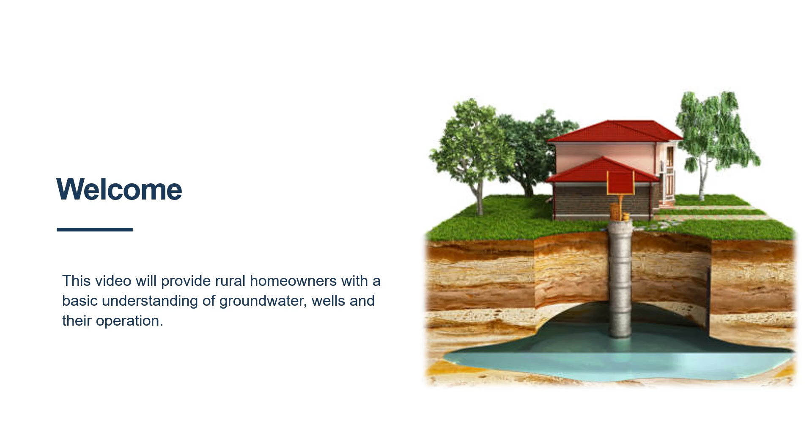Welcome to Introduction to Wells. This video will provide rural homeowners with a basic understanding of groundwater, wells, and their operation.

The water cycle is the movement of water between land and bodies of water. It naturally recharges our surface and groundwater sources. Let's take a closer look at the water cycle and how our groundwater supply is maintained.

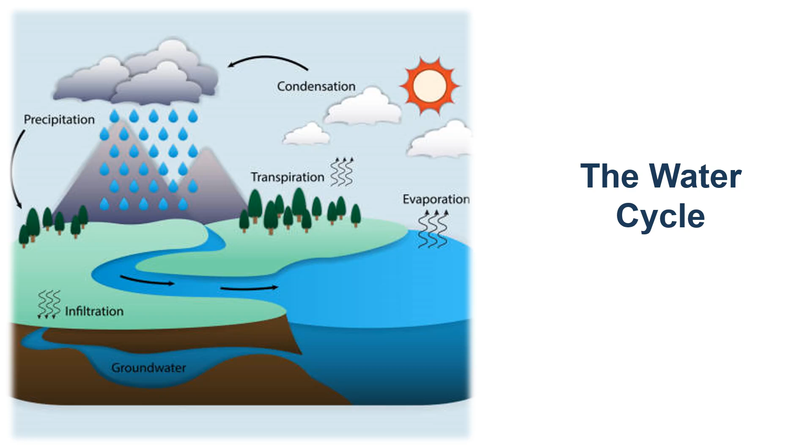Let's get the big picture of where drinking water comes from by looking at the life history of water, called the hydrological cycle. We'll look at this cycle by starting up in the clouds. Water vapor condenses and falls as rain or snow, which are two different forms of precipitation.

Then it takes one of two pathways. It flows as runoff over the surface of the earth and collects in lakes and streams. This is called surface water, or it soaks into the ground, called infiltration, and becomes groundwater.

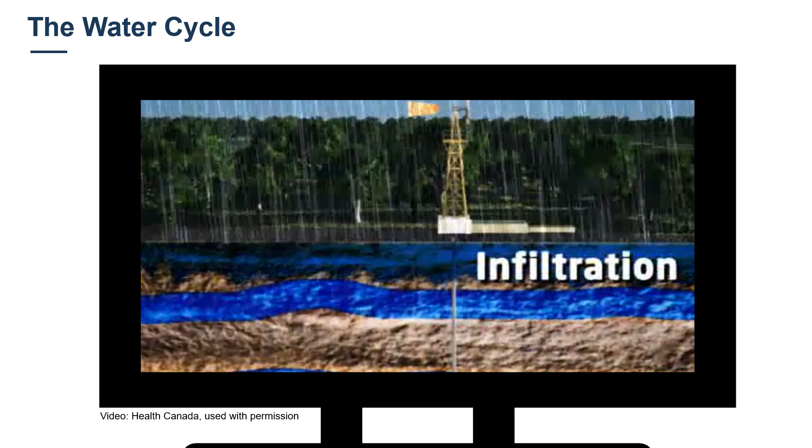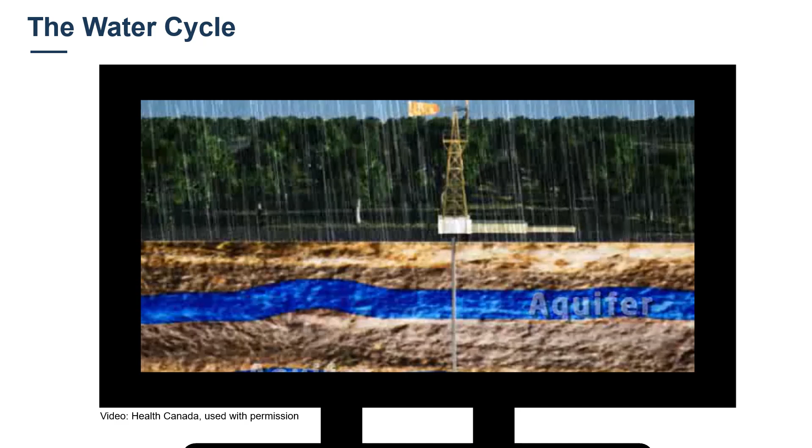Groundwater concentrates in underground regions called aquifers. To use this water, we drill wells. Some water from aquifers flows into lakes and oceans. There, it becomes surface water.

Some surface water will evaporate and return to the atmosphere. Surface water also flows to the oceans, and some evaporates back into the atmosphere. In addition, water evaporates from trees and plants after being absorbed from the ground. The evaporated water forms clouds by condensation, and the cycle begins again.

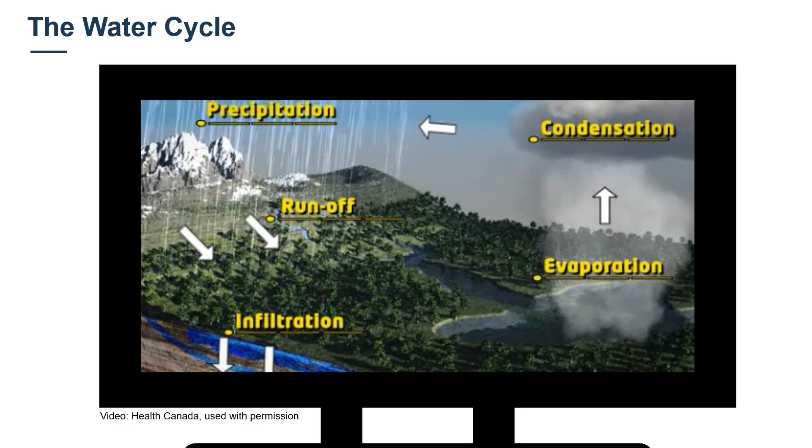During each phase of the hydrological cycle, water can pick up contaminants that are harmful to people.

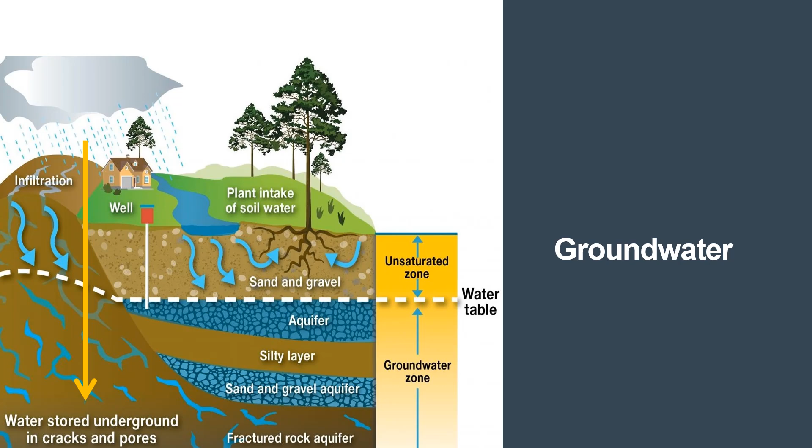Groundwater sits below the Earth's surface. It is recharged by the infiltration of precipitation that soaks into the layers of soil. But we should be aware that water may not be pure. Let's watch a brief video about potential contaminants in our water.

Natural sources of water, surface water and groundwater, contain contaminants and are never pure water. These contaminants can come from natural sources. Animals, plants, and the soil can all contribute contaminants to water.

Human activities can also add contaminants to water. Urban wastewater and stormwater, industrial activities, and activities on the land such as farming and forestry are just a few examples.

The most significant acute health risk to a consumer is drinking water contaminated with microorganisms that you cannot see without a microscope. Although a lot of microorganisms found in nature are harmless, it is important to understand that those coming from the digestive tracts of animals and humans can potentially cause illness and are referred to as pathogenic.

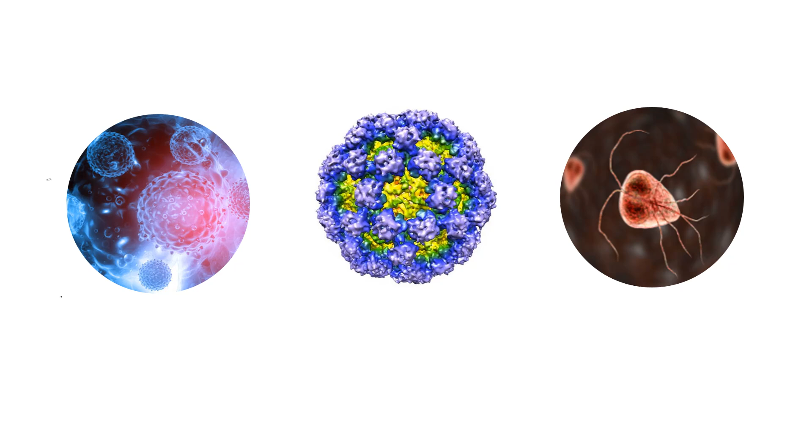The three main groups of organisms that may cause illness are bacteria, viruses, and protozoa.

Bacteria are the most well-known type of pathogen and are found everywhere. While most are harmless to humans, exposure to harmful bacteria through drinking water can lead to severe illness, or in some instances, death. Just one exposure to bacteria can cause health problems related to the stomach and intestines. Symptoms can develop over the course of a few days, or after just several hours.

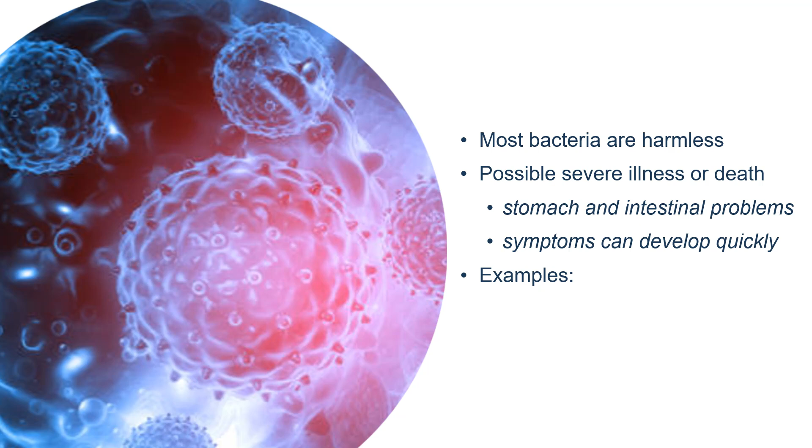Examples of bacteria include E. coli, Salmonella, and Campylobacter.

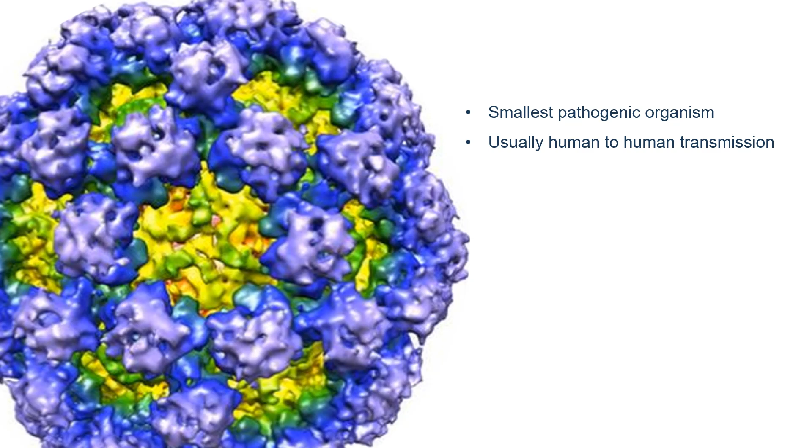Viruses are the smallest of the three pathogens described here. In fact, viruses are the smallest of all microbes. With few exceptions, a human is only affected by viruses from other humans, as most viruses prefer a specific group of hosts. To determine if a water source may be contaminated with viruses that could be harmful, consider this question: are there human sources of contamination present?

Although it was once believed that viruses were only a concern for surface water systems, and that deep groundwater was secure from viral contamination, it has recently been discovered that viruses can not only reside in aquifers, but can travel through them with the movement of groundwater. It is possible that human contamination from elsewhere could reach your raw water source, even if you are using groundwater.

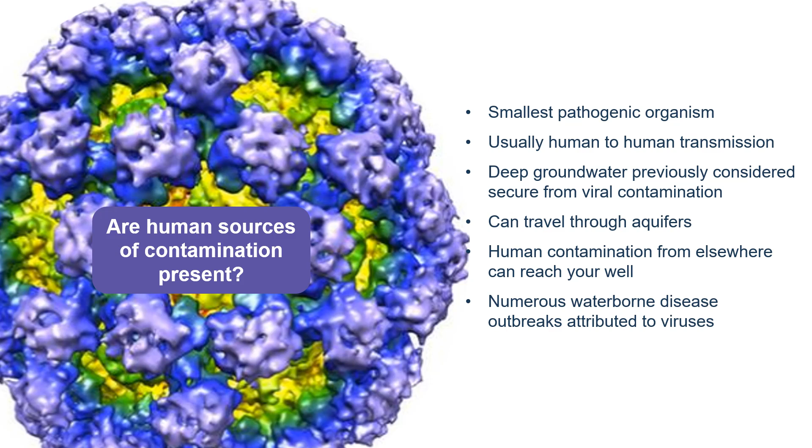Numerous waterborne disease outbreaks have been attributed to viruses, though it is sometimes difficult to determine the exact source of contamination or the specific virus involved. Examples of viruses found in drinking water include hepatitis and norovirus.

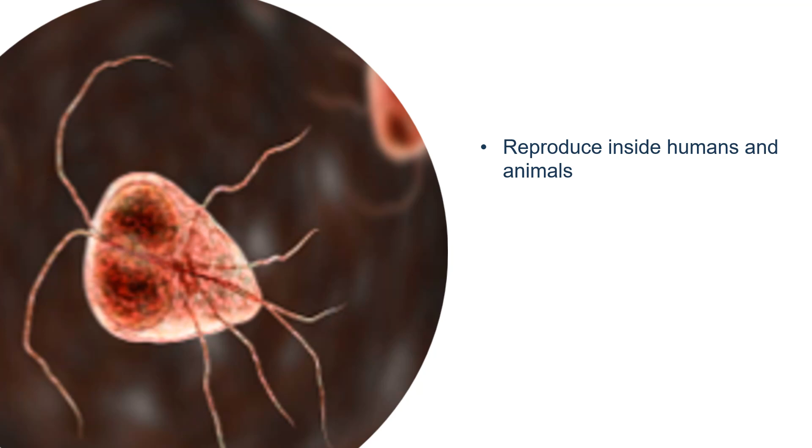Protozoa are unable to reproduce on their own. Humans and animals act as hosts for reproduction, and typically cause gastrointestinal problems or worse.

We usually find these organisms in surface waters and groundwater under the direct influence of surface water. Although they are typically not as prevalent as bacteria, protozoa are still a major concern. Examples of protozoa found in groundwater are Giardia and Cryptosporidium.

Let's find out more about E. coli and the total coliforms that are referenced in your drinking water test results.

Coliform is a common name for a group of bacteria. They are found in the feces of humans, warm-blooded animals, and in soil. Coliform bacteria are not necessarily pathogenic or dangerous to humans. However, coliforms are generally found in greater numbers and are hardier than other pathogenic bacteria.

Therefore, the presence of coliforms is used as a possible indicator of fecal contamination, as well as the presence of other pathogenic microorganisms associated with fecal contamination. For drinking water to be considered safe, there cannot be any total coliform or E. coli found in the water sample.

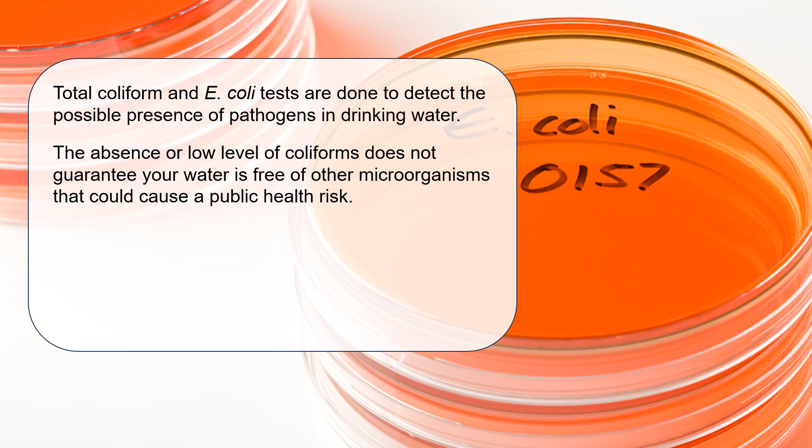Total coliform and E. coli tests are done to detect the possible presence of pathogens in drinking water. The absence or low level of coliforms does not guarantee your water is free of other microorganisms that could cause a public health risk. You must test your water frequently to reduce the risk of contaminated water reaching consumers.

The location of all Ontario public health units can be found online. Contact your local public health unit if you have concerns.

Now let's review the regulation that well drillers are required to follow when installing and maintaining wells, and the different types of wells that deliver water to our homes.

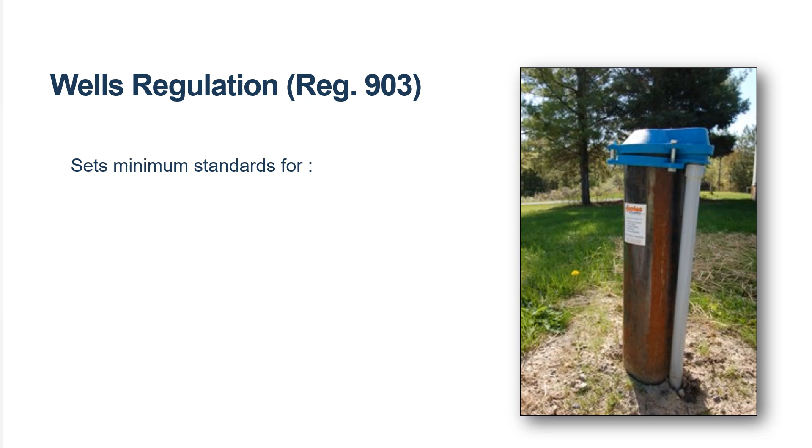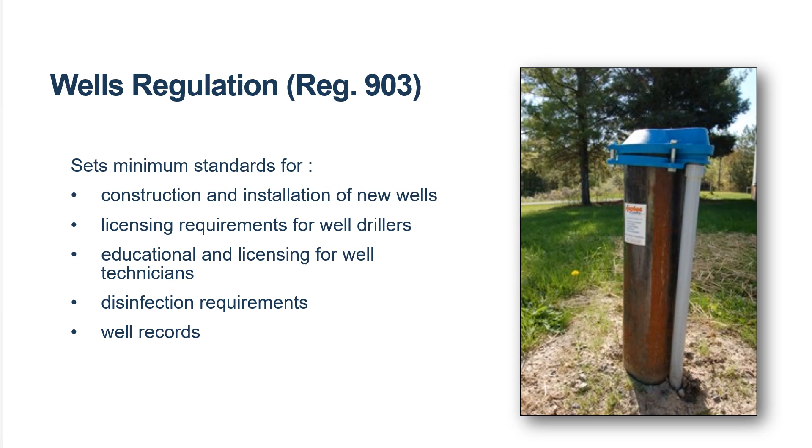Owners and well contractors have legal responsibilities for ensuring the protection of the province's groundwater when drilling a well. Ontario Regulation 903, made under the Ontario Water Resources Act, sets minimum standards for the construction and installation of new wells. The regulation also sets rules regarding the qualifications of well contractors, the education and licensing required for well technicians, disinfection requirements, and well records. The complete well regulation can be found online.

There are 4 common types of groundwater wells in Ontario: drilled, dug or bored, shore, and sandpoint wells. The water table depth and nature of sediments are key factors that determine the type of well to be constructed.

Drilled wells are constructed using a drilling rig and a drill bit. There are many different types and structural differences depending on the aquifer. Current legislation requires that the well casing should extend a minimum of 40 centimeters above ground level and 6 meters, or 20 feet, below ground.

The well casing serves as a house for the pumping equipment as well as the wall of the well, protecting the well from contamination or cave-ins.

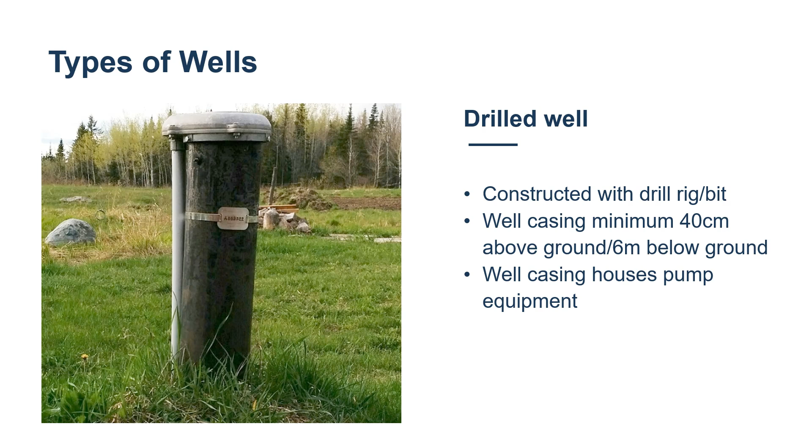Dug or bored wells, often hand-dug in the past, are now constructed primarily with excavation equipment such as an earth auger. The borehole is then lined, or cased, with masonry or concrete. Dug wells can only be installed when the groundwater is close to the surface, 9 meters or 30 feet deep.

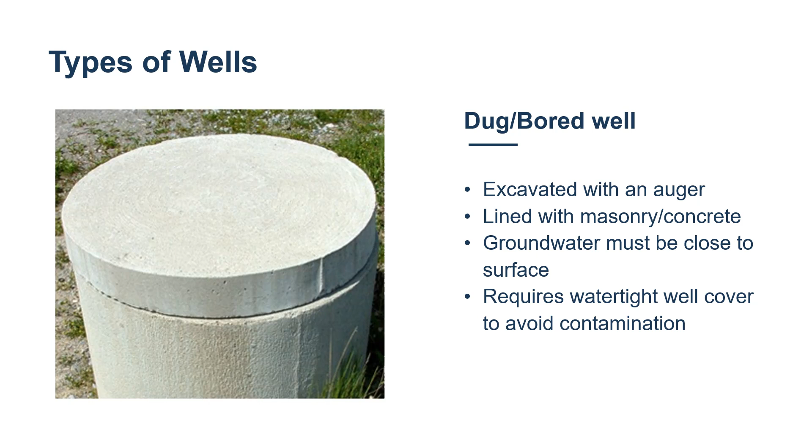The well casing must be covered with a solid, watertight well cover so that surface water and other foreign materials cannot enter the well.

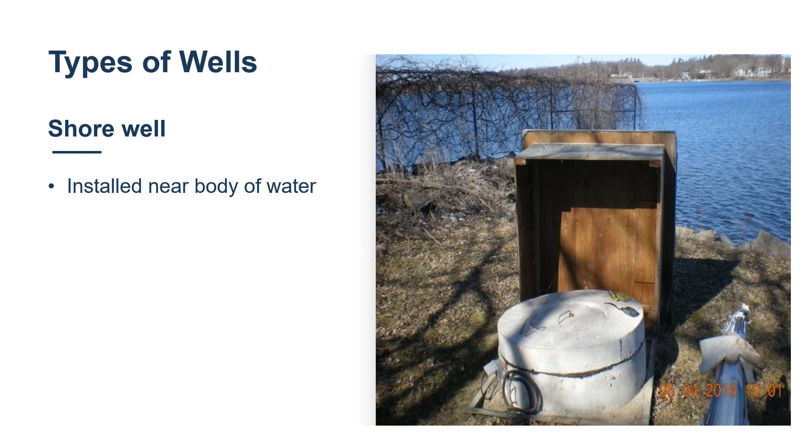Shore wells, also known as infiltration galleries, are shallow wells installed near a water body in a shallow aquifer directly connected to surface water. Water is collected through a covered stone-filled trench that drains surface water to a storage well or tank. Soils surrounding shore wells provide minimal filtration.

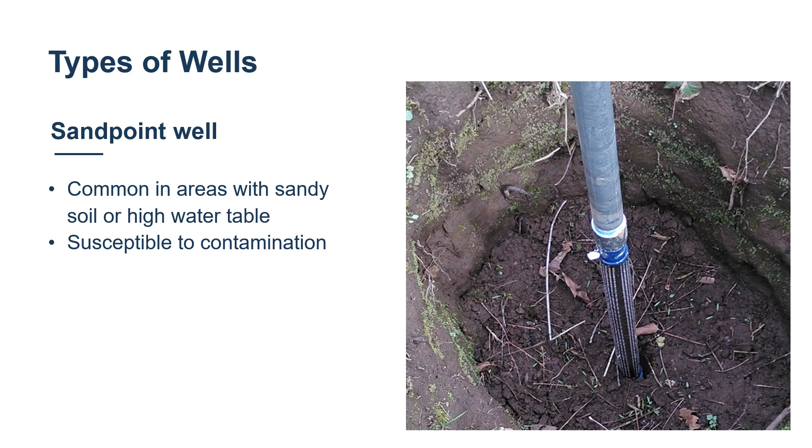Sandpoint or driven wells are common in areas that have a lot of sandy soil, as well as areas with a high water table. The narrow casing of a sandpoint well is driven into the soil up to 6.5 meters. This type of well is susceptible to contamination and has a low water yield.

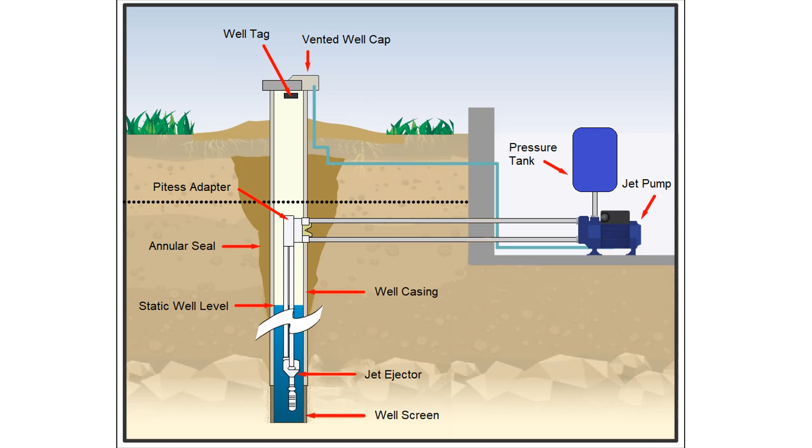Once a well is installed, you do not see all of the components that are required to deliver water to your home. In this diagram, you will see some of the key components of both drilled and bored wells. Let's look a bit closer at some of them.

Wells installed since the 1970s have tags attached to the cap or casing that have a unique identifier linking the well to its record.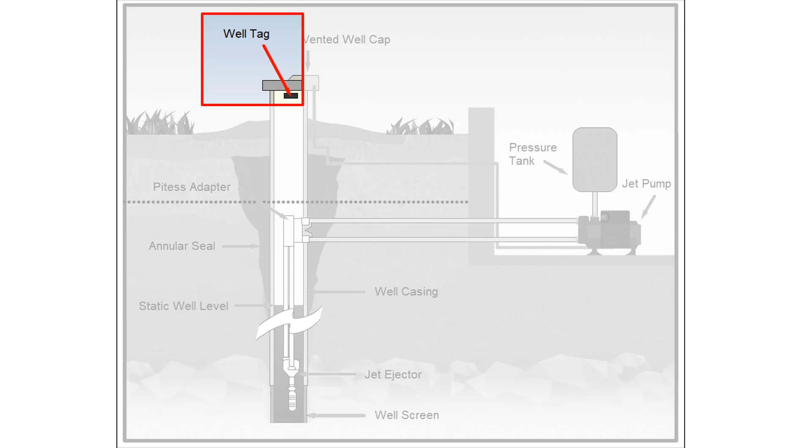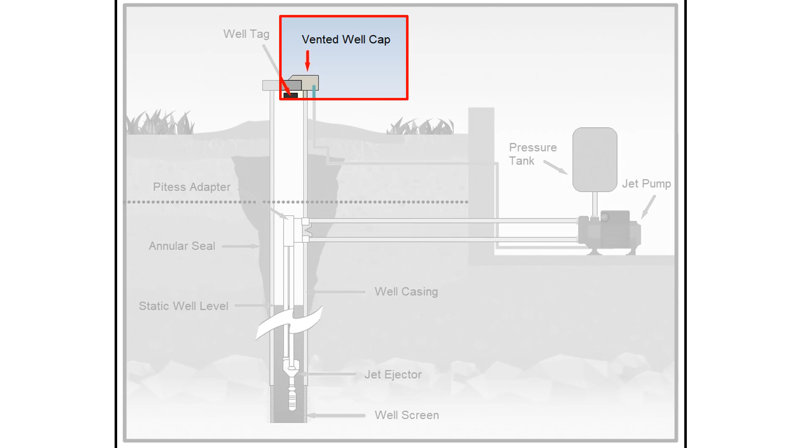The vented well cap allows gases to vent out and prevents a vacuum effect when your water level falls. Well caps also serve to prevent vermin and other contaminants from entering your water supply.

The ground around the casing must be mounded and sloped away from the area, decreasing the likelihood of pollution entering the well.

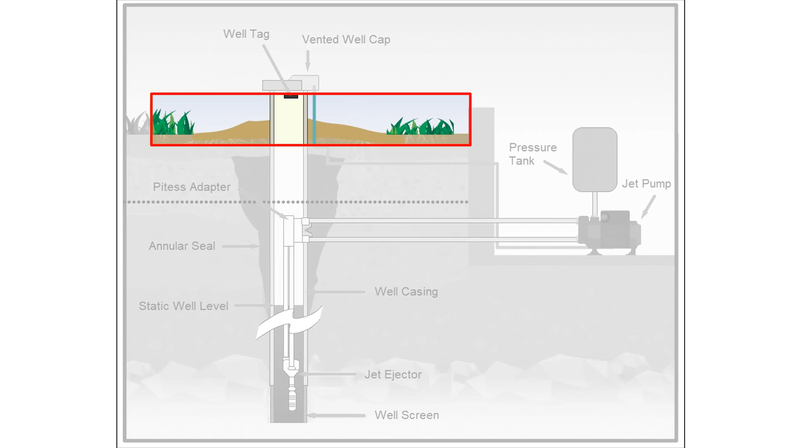The pitless adapter is a fitting on your well casing that provides a frost-free connection between the well and your home.

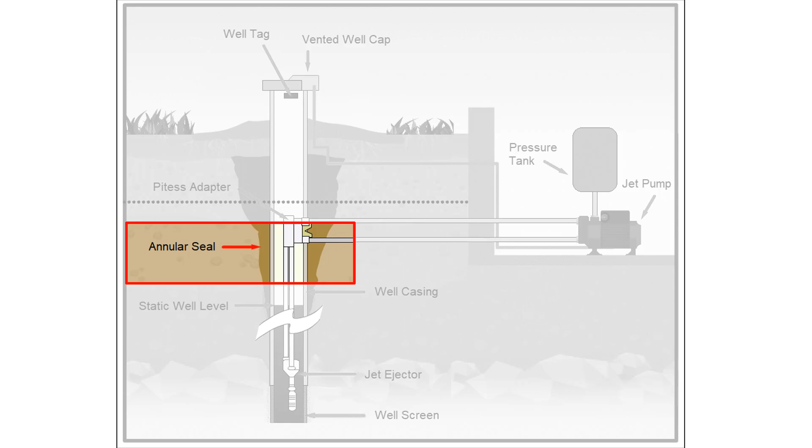The annular seal is the opening between the casing and the side of the well that is filled with a mixture of cement, bentonite and sand to make a watertight seal. This annular seal provides protection to the aquifer.

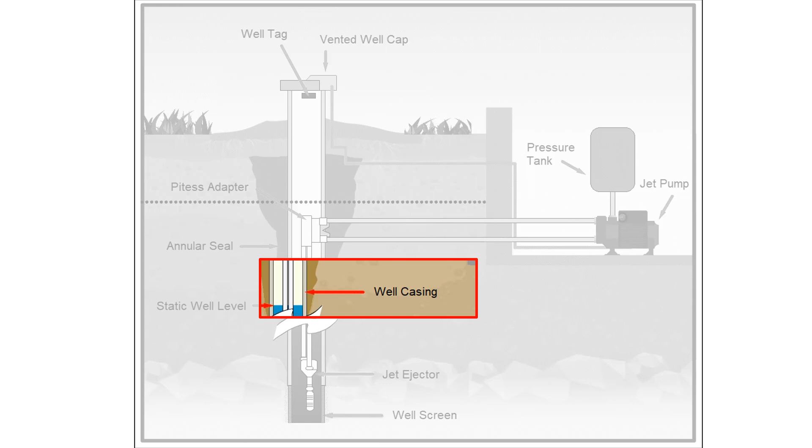The well casing is a steel or PVC tube installed in the borehole to maintain the well opening and protect the well from collapsing.

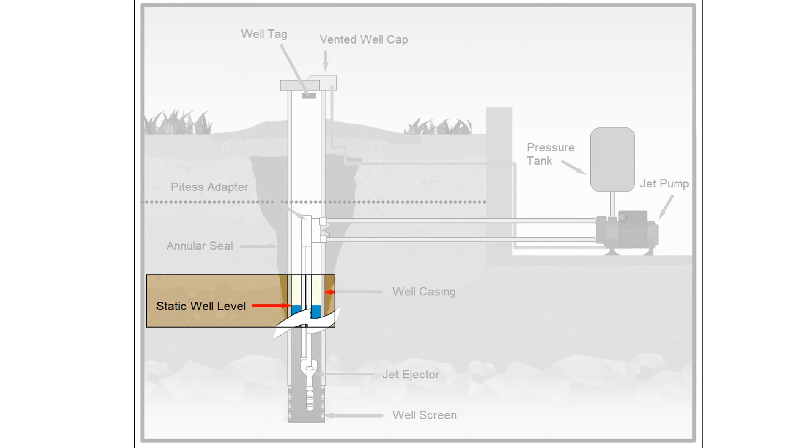The static well level is the distance from the ground to the water in the well during non-pumping conditions. This level can be affected by changes in climate and pumping that is occurring in nearby wells.

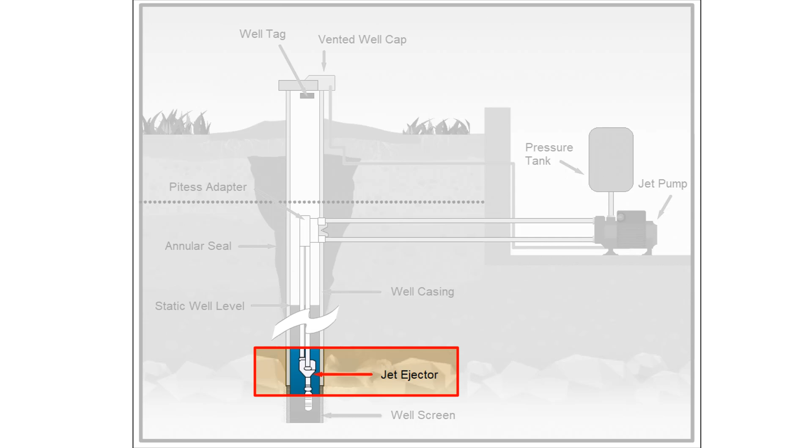The jet ejector uses pressurized water from the pump to push water up to the pump. The well screen allows water to enter from the aquifer while preventing sand and other materials from entering the well.

Next, let's look at pumps. Either a submersible pump or jet pump may be used to get the groundwater from below the surface, up through the well to your home.

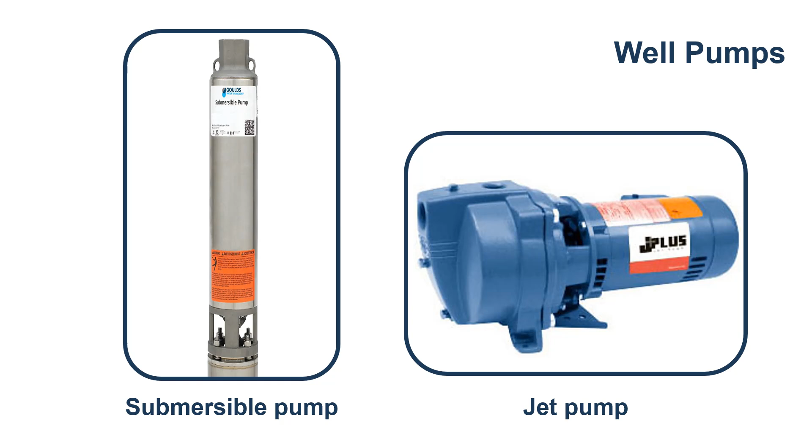A submersible pump is a type of water pump designed to be installed in the well casing and submerged in the water. The motor of a submersible pump is hermetically sealed and is located below the intake screen to provide cooling. The pump works by pushing water to the surface.

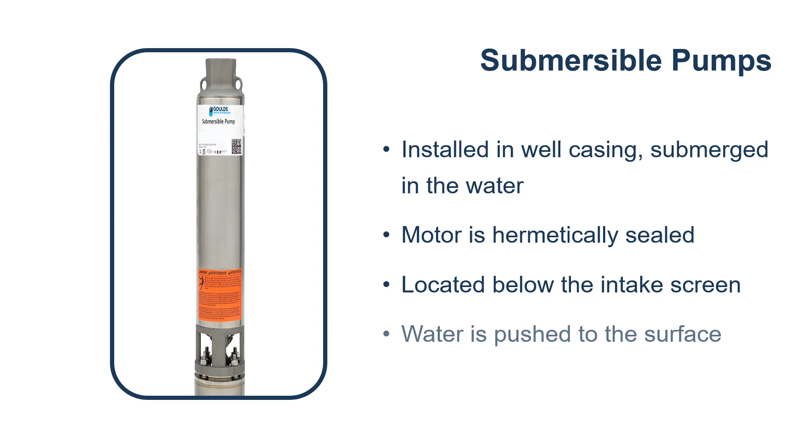There are two types of jet pumps. The shallow well jet pump is designed for use in systems where the water is less than 25 feet in the well. Deep well jet pumps are suitable for deeper wells that have water up to 150 feet. The pumps are positioned outside the well and are often located in a home or other building.

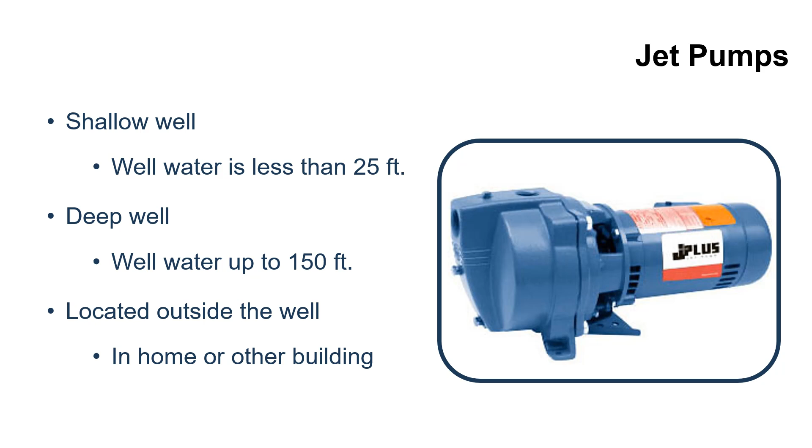You will receive the well record from the well driller after installation. Let's review what a well record is, and how the information found here can help you with future troubleshooting and well maintenance.

The following content has been provided by the Ontario Ministry of the Environment, Conservation and Parks, or MECP.

Well record forms may vary in appearance, but all require the same mandatory information.

This is a sample record completed by the well contractor and given to the owner of the well after the final inspection. A copy also goes to the MECP.

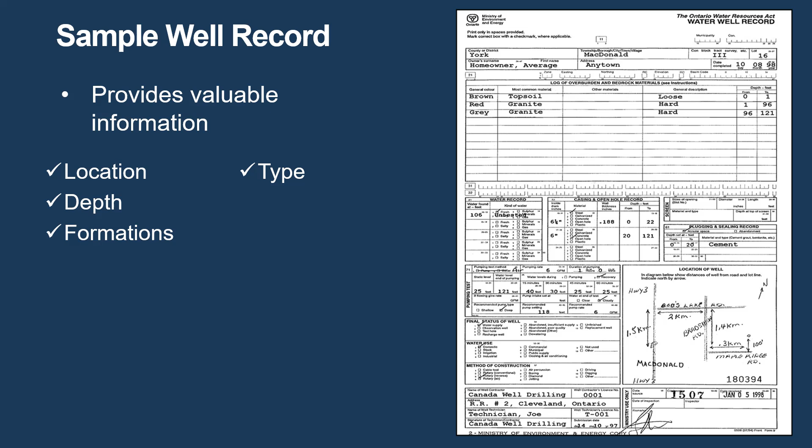The well record provides valuable information on the well location, depth, types of formations encountered, well type, well materials, pump test results, and any known water problems at the time of pumping.

The record should be kept for as long as the well is used. The information is important if maintenance or repairs are necessary on the well. Let's look at a few key sections of the well record in detail.

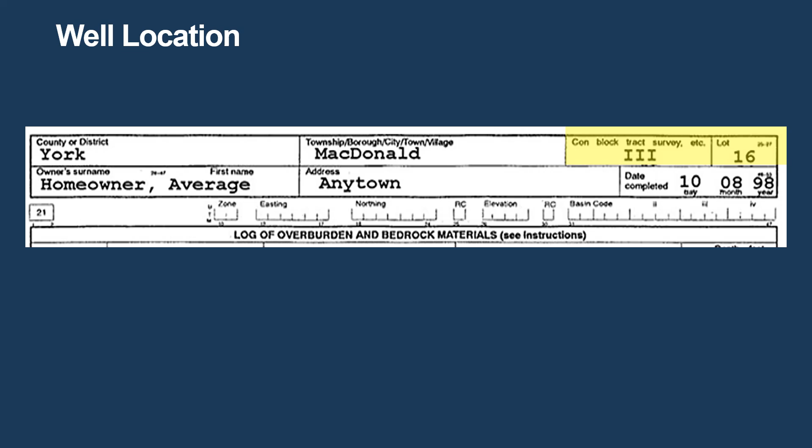This section contains the well address and owner information, which can help new property owners find well records on databases. Location information includes the street address and the city, town or village of the property. The original geographic township, concession and lot must also be reported if the well is in an area where such information exists.

A map showing all property boundaries must be provided. At least two measurements sufficient to locate the well in relation to fixed points must be indicated. In this example, the well is located 100 feet north of Maple Ridge Road and 0.3 kilometers from Bradshaw Road. A north arrow must be included on the diagram.

It is important to accurately record the location of the well. Inaccurate location information on the well record can lead to problems locating the well in the field.

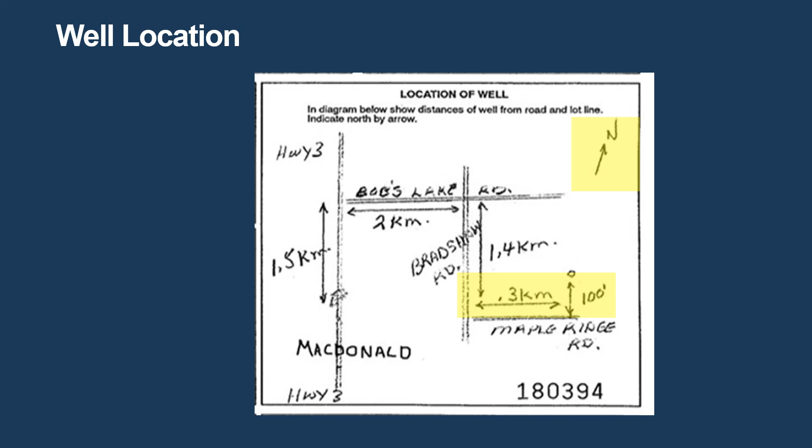This section provides information about those responsible for constructing the well and must be fully completed. The well driller will record the depth at which water is found from the ground surface.

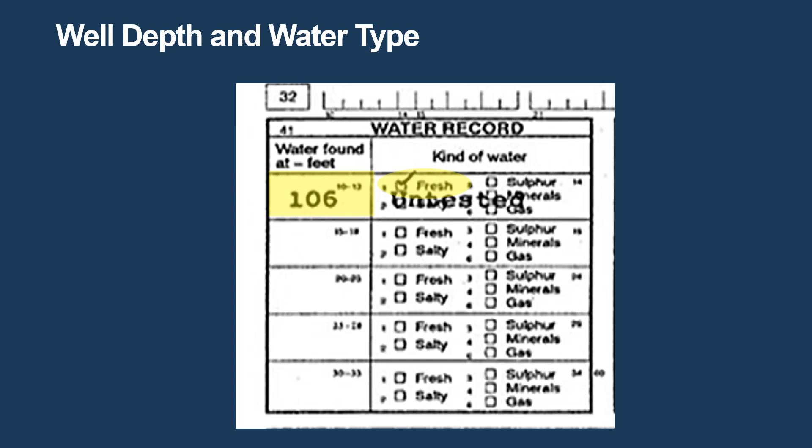Using our example, fresh water was found at a depth of 106 feet. By indicating the water is fresh, no taste, odor or color issues were found. In our example, the well has been drilled through topsoil and then several layers of granite.

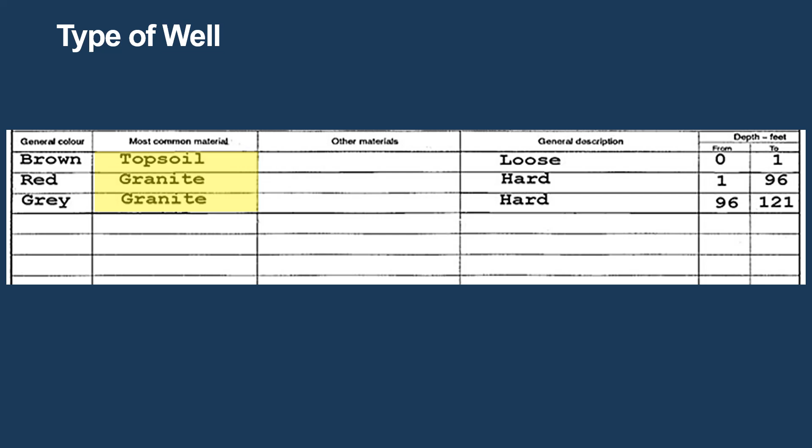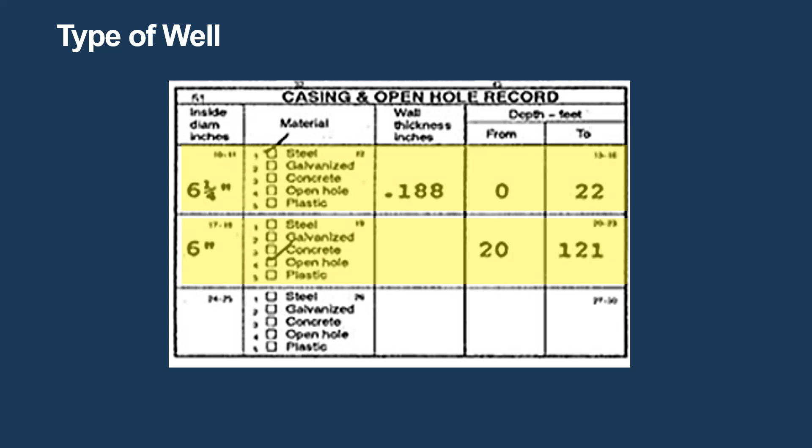There are a variety of materials used for a casing, and the diameter may vary for each section. In our well record example, two measurements have been provided. From a depth of 0 to 22 feet, the inside diameter of the casing is 6¼ inches, made of steel. From 20 to 121 feet, the well is an open hole 6 inches in diameter.

The static water level indicates where the water is in the casing. Typically, water drawn from a confined aquifer will have a pressure differential that results in the water level rising up the casing higher than the level where water is found.

In our example, the static water level is 25 feet. When pumping has stopped, the water level is at 121 feet. The well driller has recommended a deep or submersible pump.

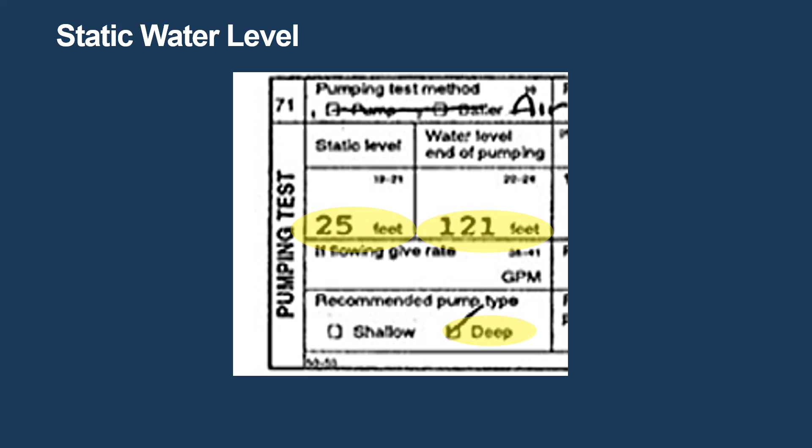The pump test results portion of the well record is very important when it comes to maintenance required on the well, as it gives a history of the recovery time of when the well was originally tested. It also has the recommended pump setting depth and recommended pump rate. This information is required to have your job properly quoted prior to the work being completed.

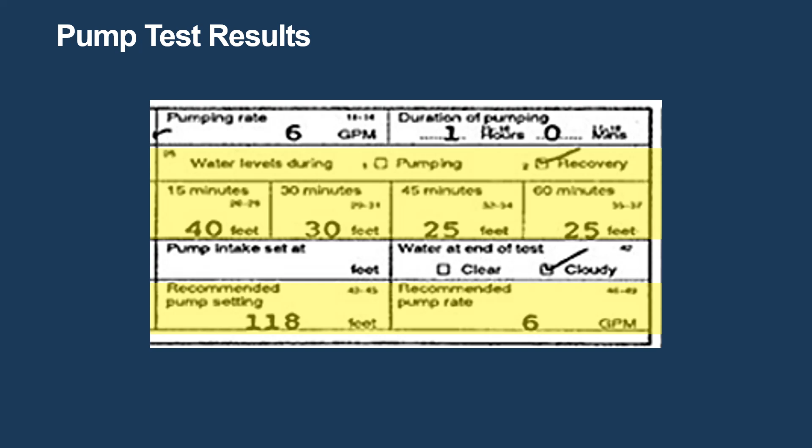Depending on the ongoing demand on the well, it is often recommended to have a pump test done to determine the current flow rate and recovery status every 5 to 10 years. This portion of the well record gives the original readings of the well rates and recovery times, which is then compared with current values to determine if further maintenance is required.

If you are plugging or abandoning a well, the details are included in this section. Information about the type of product used, as well as information regarding how far down the well was sealed, appears in the depth column. Annular space information can also be found in this area if the well is not being abandoned. Information will include the type of sealant installed in the annular space, as well as the amount of sealant used. Here we see that this well has been sealed with cement to a depth of 20 feet.

If you do not have a copy of your well record, you can visit the MECP's Well Records webpage and search for well records by address or well ID or tag number. This will take you to an interactive map page. Alternately, you may also contact the ministry to have a copy sent to you.

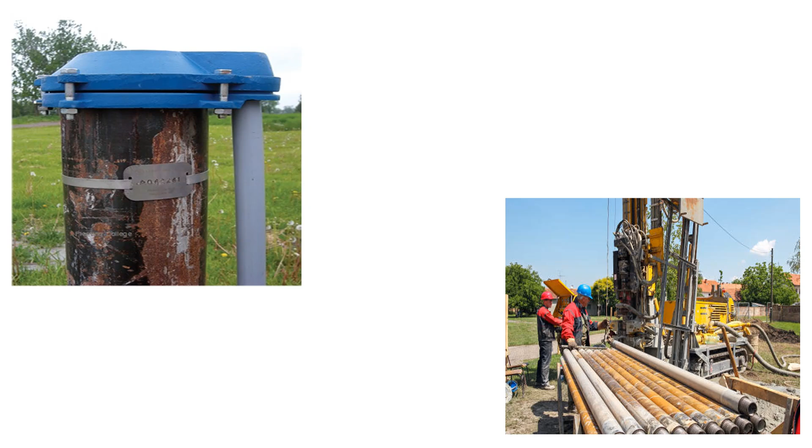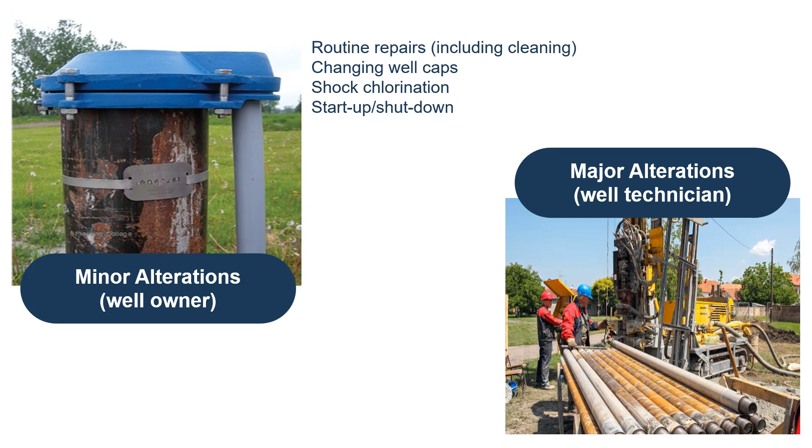Well maintenance involves shared responsibility. Minor alterations can be completed by well owners. These alterations include such tasks as routine repairs including cleaning, changing well caps, shock chlorination, and performing startup and shutdown procedures. For major alterations, tasks must be completed by a licensed well technician. This includes cutting the casing, adding casing extensions, installing a well screen, changing the pitless adapter, measuring the well yield, well rehabilitation and well abandonment.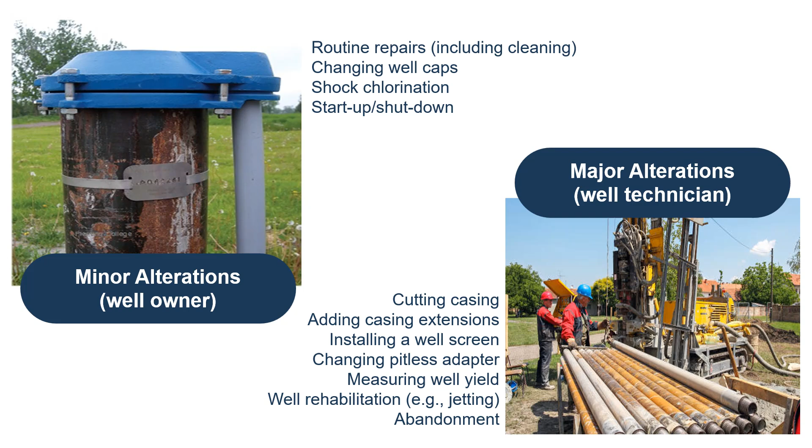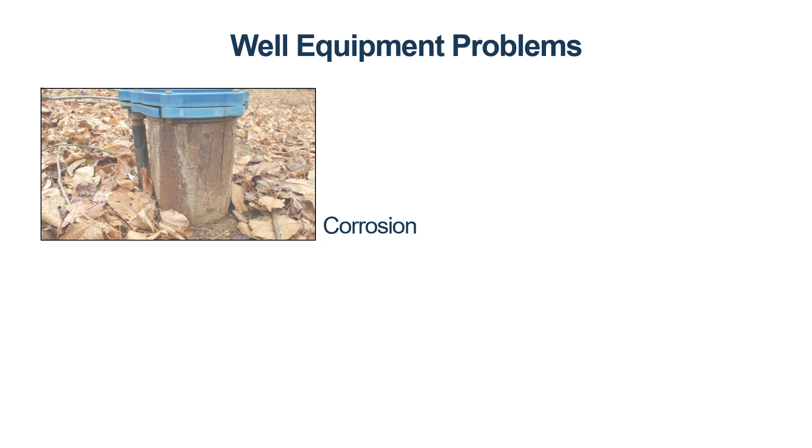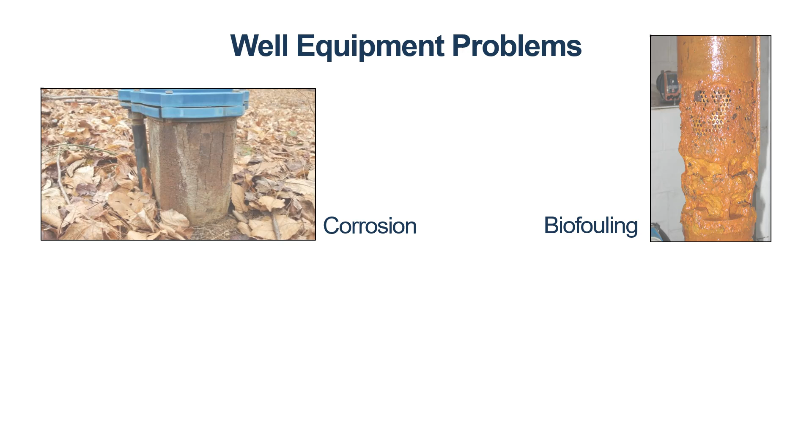Wells can present a number of challenges for owners. Corrosion of the well casing or screen results in large quantities of sand in the pumped water, impacting the water quality and equipment. Biofouling, often simply referred to as iron bacteria, can develop due to microorganism reactions and may allow non-pathogenic and pathogenic coliform organisms to take up residence within the well. Naturally occurring iron or manganese may cause aesthetic color and taste issues with the water.

Well yield, defined as the sustainable rate of water flow that a well can draw continuously over an extended period, can be impacted by such things as increased demand from neighboring wells or clogged well screens.

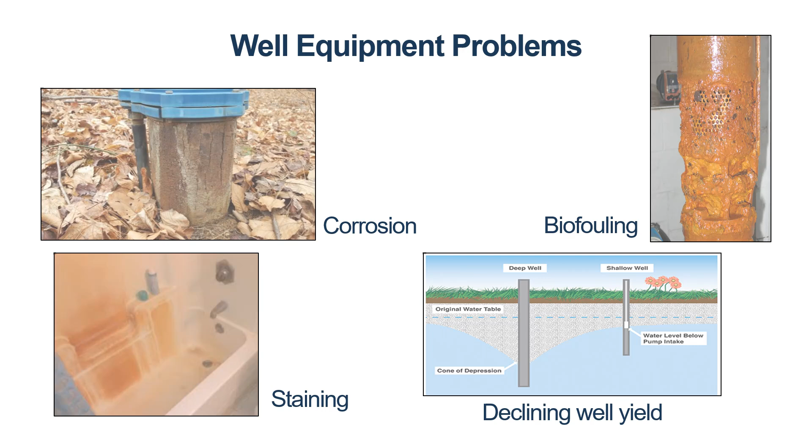Next, we'll review when and how an owner would consider performing a well disinfection as part of maintenance or after an adverse water sample result.

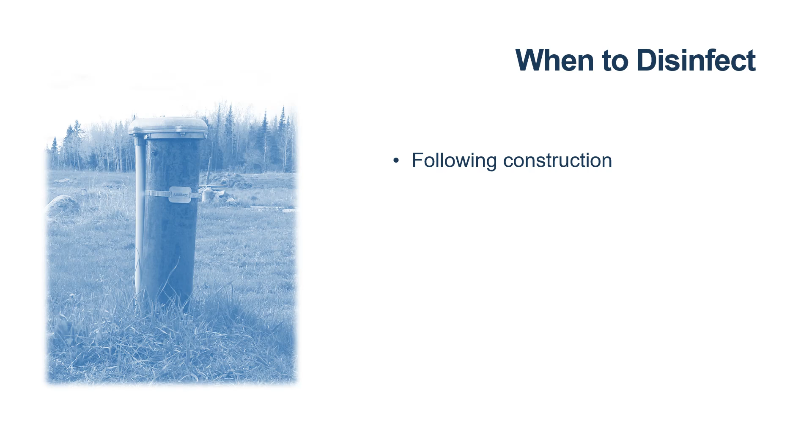Under the Wells Regulation 903, disinfection is performed by the person constructing the well once construction is complete. Disinfection must also be performed as part of installation or reinstallation of pumping equipment, following the deepening or extension of a well, or when conducting other than minor alterations or repairs on an existing well or on equipment in a well.

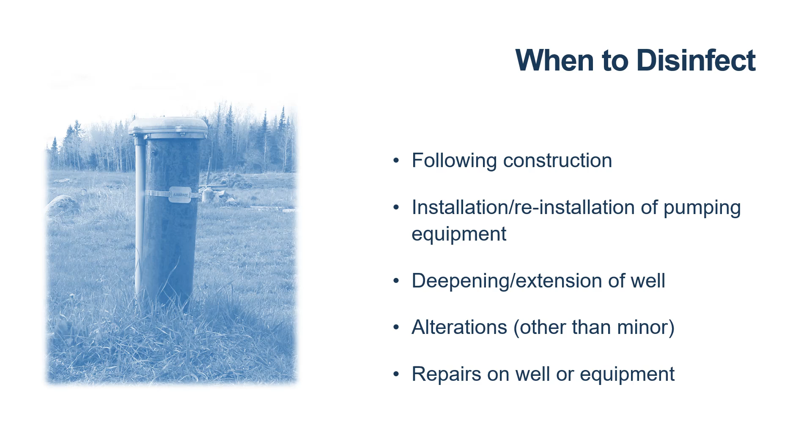Disinfection is also required when total coliform is persistent after flooding, and when E. coli is found in the distribution system, for example following a pump repair. Disinfection may help improve yield if your well is exhibiting slime growth, or if a well has been left dormant.

Public Health Ontario has created an interactive online well disinfection tool for public health inspectors, well contractors and well owners. The tool provides an easy way to calculate the amount of chlorine product required for adequate disinfection. The tool also provides procedures and precautions to take when disinfecting the well.

Using information from your well record, enter the required information regarding your well's diameter, depth, and water level. Then, input your desired concentration of chlorine, which for a standard disinfection would be 50 parts per million, and lastly, add the percentage of chlorine. This number can be found on the chlorine container.

Using the data we have entered for this example, the tool calculated that there is 534 liters of water in the casing. And to get a concentration of 50 parts per million strength of chlorine, it is recommended you add 584.57 milliliters of bleach solution.

For the steps to safely and correctly perform a well disinfection, follow the instructions found at the bottom of the Well Disinfection Tool webpage.

If you have additional questions, you can reach out to the Ontario Groundwater Association. For free homeowner water sample test kits, please contact your local public health unit.